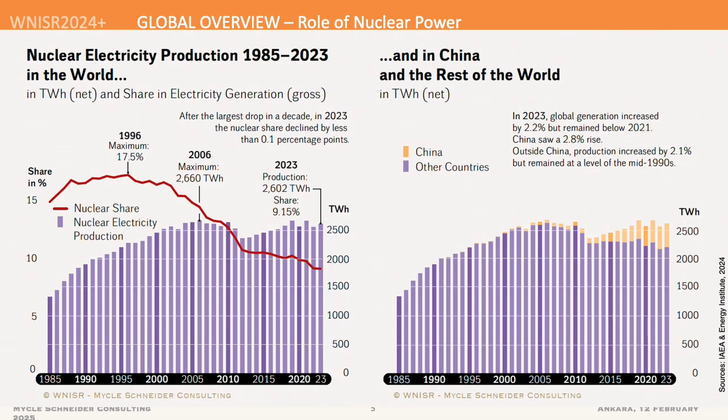The nuclear share of world electricity generation, the red line on the left, has fallen by nearly half to 9%. Nuclear output in purple has stagnated. Ember preliminarily estimates 2024 nuclear output at a 3% rise. On the right, the output growth is more than all in China, the yellow parts of the bars. In the rest of the world, it fell back to the level of the mid-1990s.

World nuclear capacity, in red, is 1% above its previous peak in 2006, because the fewer but newer reactors tend to be larger. Not included in the 411 units shown here are 31, 19 of them in Japan, that are in long-term outage. Most have been out of service for 14 plus years, without clarity on whether or when they might resume operation.

Mainly at the insistence of Japan, the International Atomic Energy Agency, IAEA, long counted those plants as operational, but then abandoned this fiction in 2022 and retroactively adopted a similar suspended operation category. In 2024, this new convention added only 8 gigawatts to Schneider's total of operating plants in this graph.

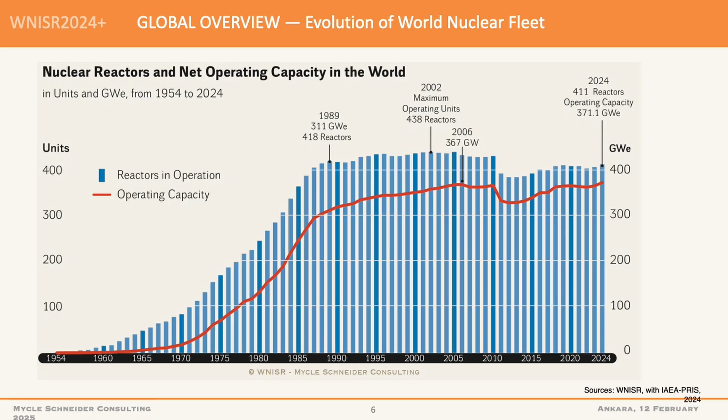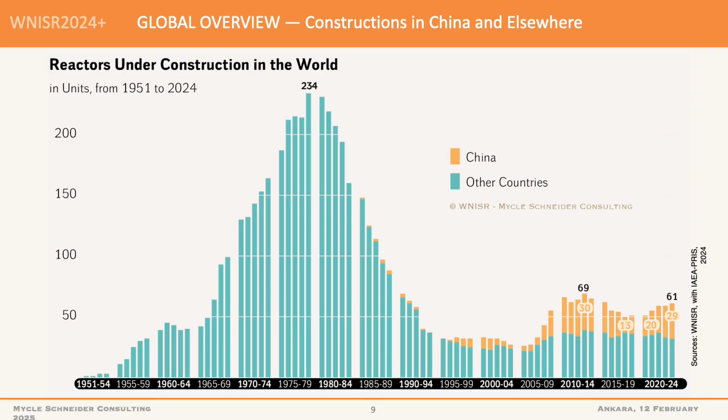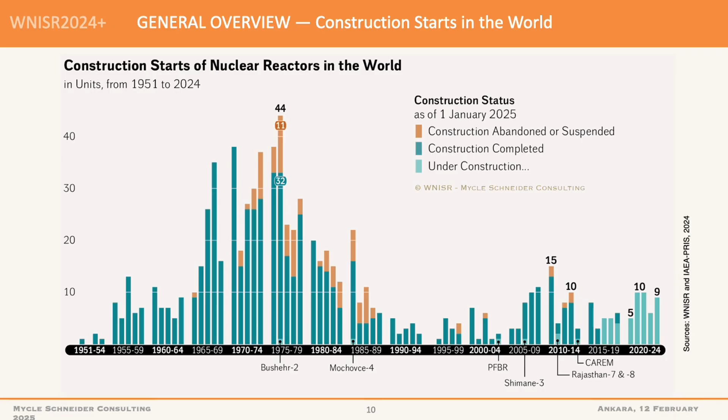Reactors now under construction are far fewer than in the 1970s, that big cluster of blue bars, and of those, 1 in 9 projects in gold didn't get finished. Now, it's hard to discern the widely proclaimed nuclear renaissance, especially outside China, with just 1 to 5 units started in each of the past 5 years.

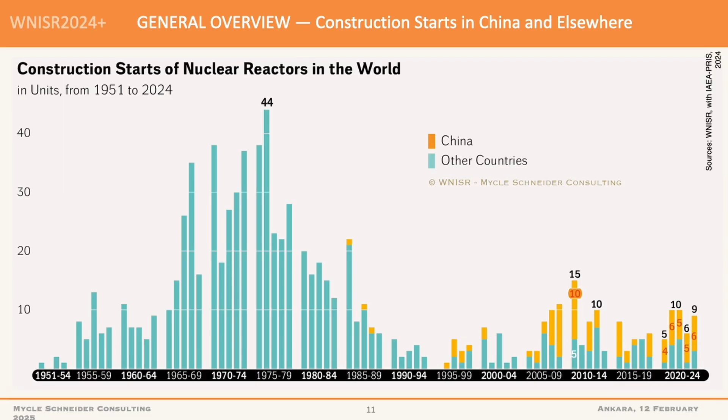3/5 of the world's construction starts, 2020 to 24, were in China, where the nuclear bureaucracy remains potent, although its targets are quietly shrinking. Despite complete government control, only 1 recent reactor in China in 2021 to 3 was connected to the grid on time.

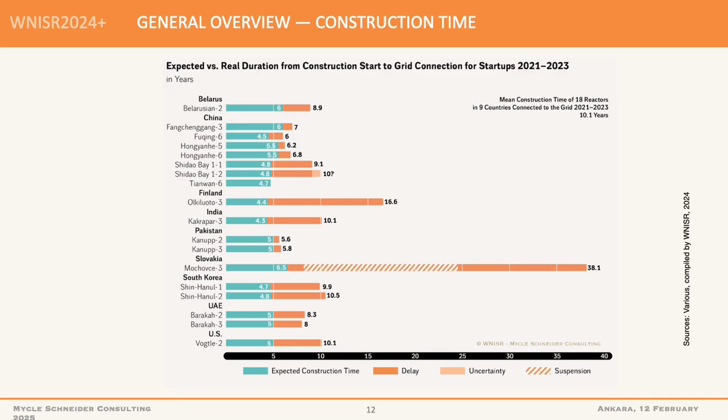Global average nuclear construction took 10 years versus China's 6 and rising, with a range from 4 to 10 years. And yes, I did mean to imply that with that one Chinese exception, no recent reactor completion has been on time anywhere. Now, China's fleet averages just 11 years old, and only 1 unit is older than the world average.

But the other main nuclear fleets are far older, and like people, they get a year older every year. Unlike people, though, intense radiation damages their materials and radioactivity complicates their maintenance.

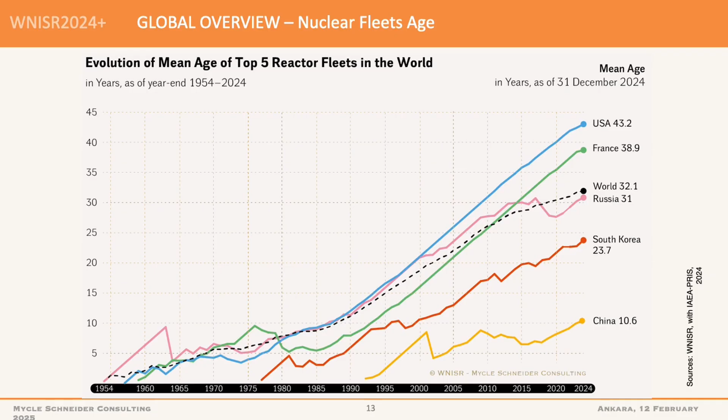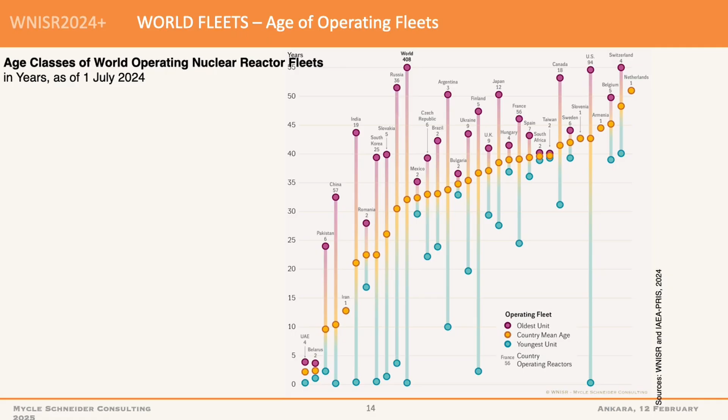Operators do try to upgrade plants with newer components, like digital controls, but this is difficult and complex, and it cannot prevent the gradual deterioration of materials: massive metal vessels, pipes, heat exchangers, welds, and so on. Most national nuclear power fleets are over 30 years old, vertical scale on the left. The oldest reactor still operating in early 2025 is in Switzerland and is just over 55 years old.

Many reactors originally designed to last 30 or 40 years have nonetheless won license extensions to 60 or 80 years. However, that extrapolation from experience may overstate their practical operating life, because old reactors, like old cars, tend to break more and cost more to fix.

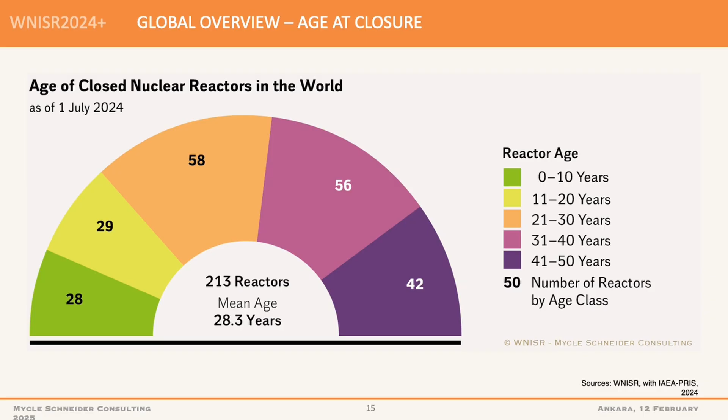Through 2024, the world's 213 closed reactors averaged 28 years of operation. The majority closed before age 30. Only 1/5 of them lasted more than 40 years. The reactors that were closed from 2019 through '23 averaged 43 years old. So again, there's not much empirical basis for extending licenses to 60 or 80, and it may not reflect how long they actually end up running.

But already the technology is scarcely relevant. In China, nuclear output was surpassed by wind power starting in 2012, by solar power starting in 2022. In 2023, China connected 1.2 nuclear gigawatts to the grid, plus 293 gigawatts of solar and wind power, because they're faster and at half the cost. In 2024, China added 2.1 gigawatts of nuclear power, plus 357 gigawatts of solar and wind power.

Globally, nuclear power in 2024 added 3.9 more gigawatts than it retired, but solar added 599 gigawatts and wind power added 131 gigawatts. So this 2 order of magnitude gap in deployment rate continues to expand for fundamental reasons. Normally, that would mean game over.

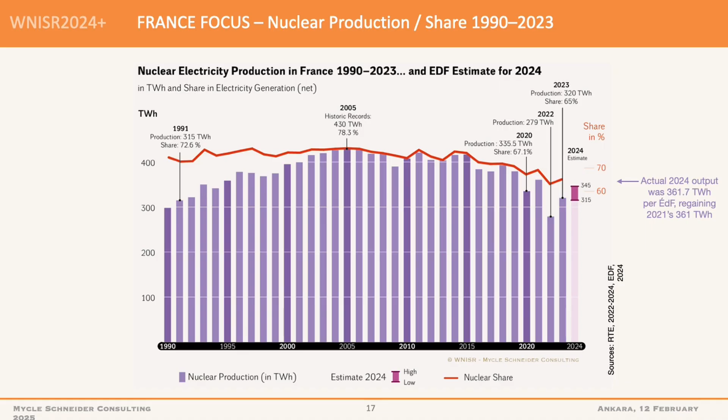If the French nuclear fleet's shortfall from 2019 to '22, as you can see at the right side of this graph, were offset by combined cycle gas generation, a reasonable assumption, it would have burned nearly twice as much gas as the spring '22 shortfall in total European gas storage that gave Putin such leverage. And the national utility, Électricité de France, cannot afford to modernize its 56 reactors, let alone replace or augment them.

The biggest economy so far to abandon nuclear power is Germany, which simultaneously slashed fossil fuel generation as renewables in 2024 soared to 55% of electricity consumption, or 63% of net public supply. And electric efficiency rose to 55% more than in 1990. In 2024, Germany's coal and lignite generation was the lowest since 1957.

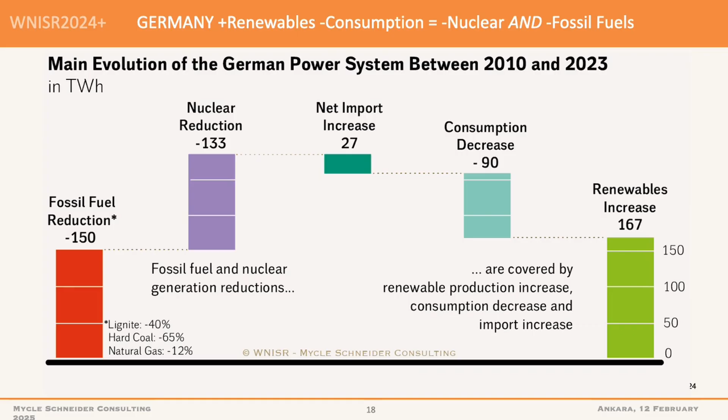You can see the evolution here with the cumulative since 2010 fossil generation going down. The reduction is in red. Nuclear going down in purple. And there was a slight increase in net imports just in the last couple of years. But meanwhile, consumption decreased in aqua and renewables soared in green. So that's how the books balance.

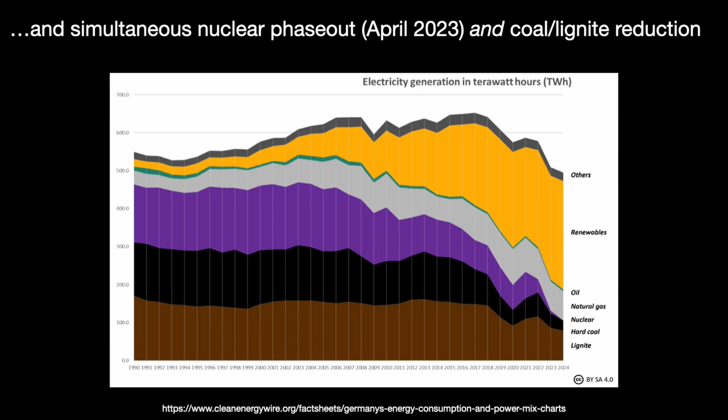Now, here's a more graphic version of what happened in Germany. Just as nuclear power in purple ended, generation from coal in black and lignite in brown continued to fall right through 2024 and still. Notice when you look at the more detailed data behind that chart, the especially steep decline in the black coal curve and the brown lignite curve from '22 to '24, even as the last reactors in purple closed forever in April '23. Claims that Germany had to burn more coal to replace shuttered nuclear plants are wrong, with or without counting international power trade.

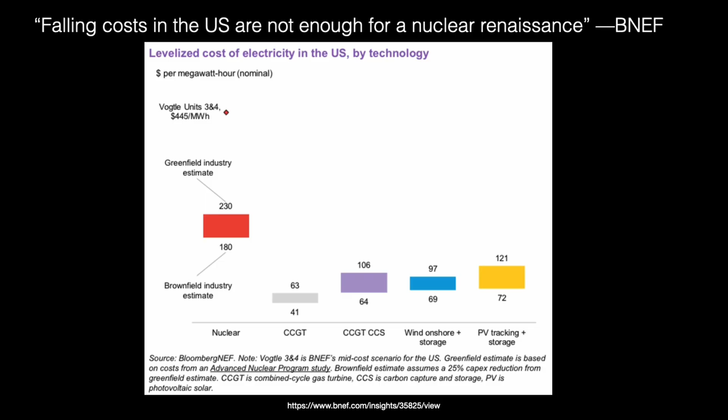But if it occurred, Bloomberg's latest comparison says it would be several-fold costlier than a new gas plant with carbon capture or a hybrid wind or solar project firmed by battery storage. History also suggests that nuclear costs are likelier to keep rising even as renewable costs keep falling. Now, empirically confirming the message of this chart, Jim Lazar points out that in less than a year, 2024, investors in free market Texas added enough wind, solar, and storage to provide dispatchable service equivalent to both the Vogtle nuclear units, but at about half their $36 billion investment, a third their operating cost, and a decade and a half sooner.

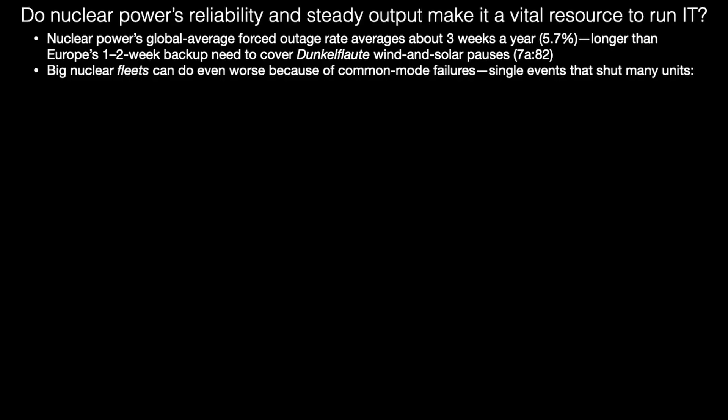Many people seem to believe that only nuclear power can provide the exceptional reliability needed to run data centers. However, the average nuclear plant suffers unexpected outages about 3 weeks per year, 5.7% of the time. That's longer than the typical total 3.5% per year duration of the Dunkelflaute dark doldrums events in Germany. Big nuclear fleets can do even worse than individual plants because of single events that shut many reactors at once, like earthquake and tsunami in Japan.

Or the French example you've seen from 2019 to 21, when repairs or safety checks closed over half the aging reactors, and steep drops in output persisted into 2024 at levels several times longer than the rare maximum wind lulls in the United Kingdom. Nuclear plants are also prone to derating or interruption by heat waves or droughts that affect their copious need of cooling water.

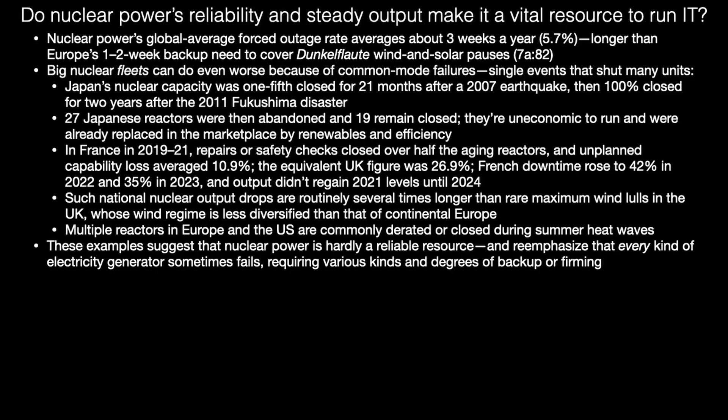So nuclear power, in sum, is hardly a reliable resource. Like every kind of electricity generator, each reactor sometimes fails, requiring adequate other arrangements like backup or firming, or the equivalent on the demand side.

Now, since early 2024, sudden forecasts of an imminent return to electricity growth rates not seen for 4 decades have often been claimed to require new nuclear plants, especially so-called small modular reactors, which are supposedly faster. But those are not yet a thing. Claims of operation in a few years are not credible. Sales hype is not evidence.

And the giant tech companies claimed to have bought various new kinds of reactors have in general only expressed interest, not entered actual binding purchase contracts. Curiosity's cheap, reactors are expensive.

A little history about the construction cost that dominates total nuclear cost. In contrast to the falling renewable costs we've seen, nuclear capital cost escalation and delay are the norm now and from the start of the industry. There are some claimed exceptions in Korea and China, but those data are unverifiable and often highly dubious.

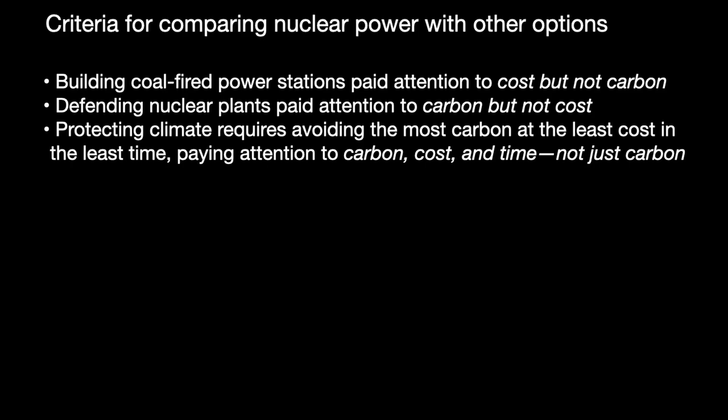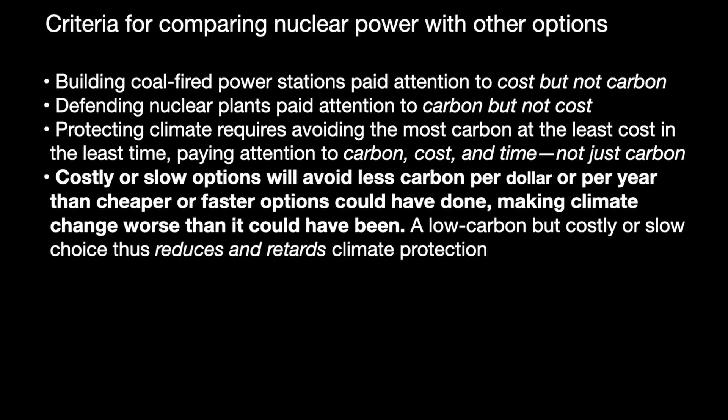So to start examining nuclear power and climate protection, let's ask, how should we compare different ways to provide electrical services? You see, we built coal-fired power plants by counting cost but not carbon. Nuclear advocates defend their option by counting carbon but not cost. But to protect the climate, we must save the most carbon at the least cost and in the least time. That means counting all three variables, carbon and cost and time. Costly or slow options save less carbon per dollar or per year than cheaper or faster options. Thus, even a low or no carbon option that is too costly or too slow will reduce and retard achievable climate protection. I posted a simple way to compare climate effectiveness using market data.

Now, many analysts ignore common sense comparisons of cost and speed. That leads to results akin to arguing that since people are hungry, hunger is urgent, and caviar and rice are both food, therefore both caviar and rice are vital to reducing hunger. Since in reality money and time are both limited, our priorities in feeding people or in providing energy services must be informed by relative cost and by relative speed. Lower cost saves more carbon per dollar. Faster deployment saves more carbon per year. We need both those outcomes.

The fraction of journalists and commentators who mention this logic is very close to zero because the nuclear industry is desperately keen that you not hear or understand these points. Now, the economic principle called opportunity cost means that you cannot spend the same money on two different things at the same time. That is, each purchase foregoes other purchases.

Buying nuclear power, therefore, displaces buying efficiency and renewables, and vice versa. So nuclear owners strive to beat coal and natural gas, methane gas, while their allies often disparage or suppress renewables. Yet most U.S. nuclear plants are uneconomic just to run, unless that's reversed by subsidy as happened, we'll see. Many of them are closing, so their powerful owners often got multi-million-dollar bailouts from malleable, or as we just learned in 3 states, corrupt state legislators and from the federal government.

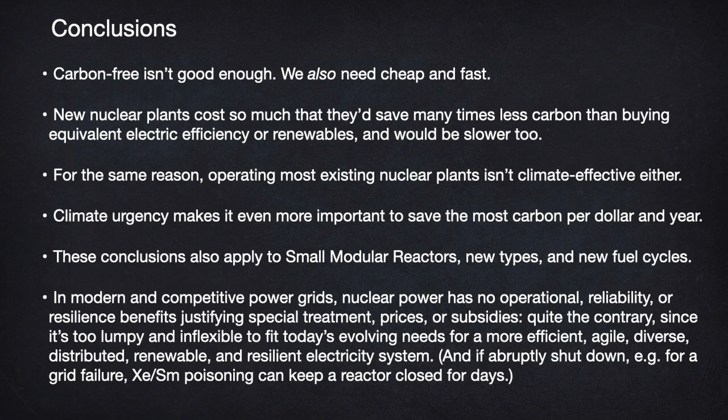Nuclear power also offers no benefits for grid reliability or resilience justifying special treatment. Instead, its inflexibility and ungraceful failures complicate modern grid operations. As we saw last week, traditional so-called baseload generation by big thermal plants is no longer needed nor economic, and the whole concept isn't even useful anymore. Such basic economic comparisons are a topic the nuclear industry normally tries to avoid. The last thing they ever want to talk about is economics. But if a technology cannot come close to competing in actual markets, its other attributes become a lot less important.

Now, obviously, dismal economics crimp new nuclear power, but that leaves the big question, what should we do about the existing 410 reactors? Should they keep operating? Many cost more to run than their output can earn, or than it would cost to provide the same services by building and operating new renewables or efficiency. There was a 2019 IEA report dubiously claiming that sustaining the existing nuclear fleet is vital for climate protection, is cost-effective, and merits government support.

But it wasn't really a fair comparison based on empirical data and counting opportunity cost. And it really rested on a very opaque model, very complex, full of assumptions that couldn't be drawn out and scrutinized. So instead, let's just examine briefly some current already paid-for reactors' empirical operating competitiveness. I'll just walk you step by step through a 2020 eye chart, now the case is even stronger, about nuclear operating costs, those that need not be paid if the plant does not operate. So the light green zone shows the range of U.S. wholesale real electricity prices from 2003 to 18.

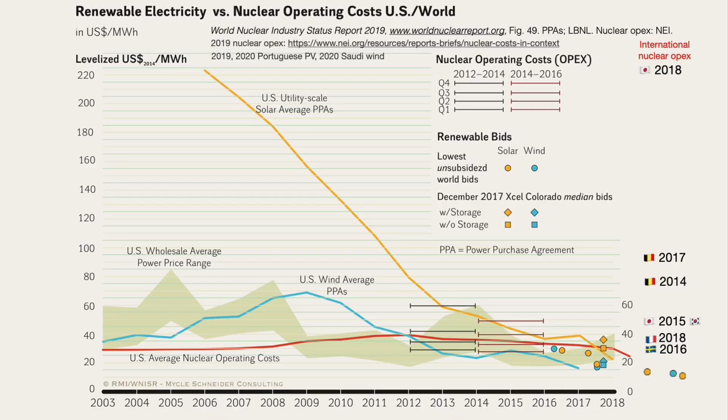Now, these operating cost data reveal an important climate opportunity that the nuclear industry hopes you won't discover. The reported operating costs for the costlier to run half of U.S. reactors a few years ago were running about 4 cents a kilowatt hour. The costliest quartile, probably around 5 cents. And the owners got those vast new subsidies to keep running those money-losing plants. Supposedly they have to prove they need the money, but the referee is the Department of Energy, which is a strong promoter.

And yet customer efficiency actually costs utilities only an average of 2 or 3 cents per saved kilowatt hour, less if they shop around. And therefore closing a top quartile cost nuclear plant and buying efficiency instead, as owners could volunteer or regulators could require, would save several times as much carbon as continuing to run the nuclear plant. In other words, it may be carbon-free in operation, but it still saves a lot less carbon than if you didn't run it. And some modern renewables could also compete with it.

In other words, while we close coal plants to save carbon directly, we should also close distressed nuclear plants and reinvest their large saved operating costs and subsidies in cheaper options to save carbon indirectly. Replacing a closed nuclear plant with efficiency or renewables, we know from when it's happened at state level, only takes 1 to 3 years. Now, if owners don't give such advance notice, perhaps to extort subsidies by making closure more disruptive, more methane gas might temporarily be burned, but then it would be more than offset by the cheaper carbon-free substitutes quickly following.

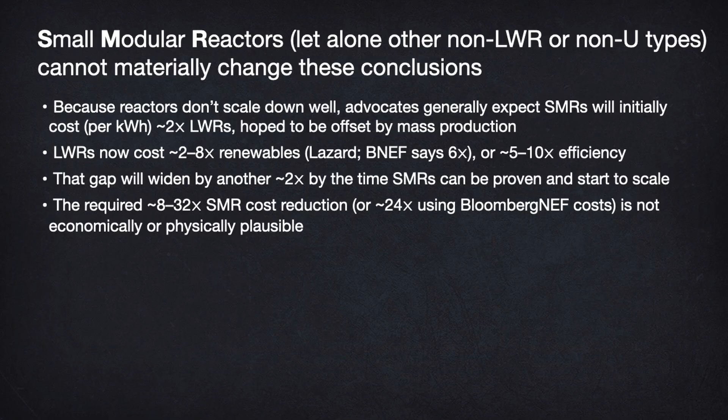costlier than on-site efficiency. But by the time SMRs, if successful, could begin mass production to capture economies of scale that way, their carbon-free rivals are set to get another twofold cheaper, based on the observed learning curves that nuclear power's never demonstrated. So just do the math. 2 times 2 to 8 times 2 means that mass production must make SMRs about 8 to 32 times cheaper, or Bloomberg's cost figures would give about 24 times. Neither of those ranges is remotely plausible.

SMRs simply can't catch up because small modular renewables, which do scale down well, have decades head start in exploiting their own formidable economies of scaling and learning. Novel reactor designs and fuel cycles offer no escape because even if the minor nuclear part of the whole prohibitive capital cost of today's reactors were free, the non-nuclear remainder would still be about 2 to 6 times too costly. Nor could SMRs be developed and scaled before the U.S. grid is decarbonized anyway without them.

So SMRs would only divert investment, attention, talent, and time from off-the-shelf, popular, benign competing technologies that have already proven rapidly scalable and that win over $1 trillion of private investment each year. Substituting slow, costly SMRs would thus make climate change worse, and it would make proliferation vastly worse. I am astounded and appalled that the Department of Defense is letting the Department of Energy undercut its national security mission by promoting the most proliferative kinds of fuel cycles, things the U.S. just spent decades with its allies trying to prevent.

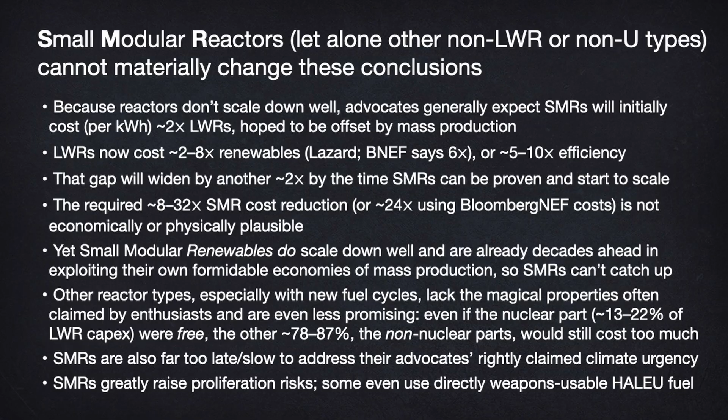Now, besides the distraction, there is, in my view, an overriding reason not to pursue nuclear power further, even if it could compete. It's the only energy source whose side effects could end civilization abruptly rather than gradually like climate change, and that requires a global safeguards regime. Clearly, that regime is not working. Iran, North Korea. Fortunately, the market collapse of nuclear power, if recognized and permitted, now offers, belatedly, but better late than never, a market-driven opportunity to cut off further proliferation at its root, and probably even roll back some that's

now underway. I've been proposing this since the late 1970s, but too far ahead of my time, so nuclear theology has prevailed, hence today's proliferation mess. But might this be an idea whose time has finally come? Let me summarize the argument very briefly in 6 points. Nuclear power makes widely available in innocent civilian disguise all the ingredients of do-it-yourself bomb kits by 20-odd known methods.

But if we didn't have nuclear power, that is, if we took economics seriously, then those ingredients would become harder to get, more conspicuous to try to get, and politically much costlier to be caught trying to get or supply, because for the first time the reason for wanting them would be unambiguously military. The civilian disguise would be stripped away. That doesn't mean that getting those ingredients of do-it-yourself bomb kits would be impossible, but it would be a lot more difficult, and it would be easier to detect timely, because it's a lot easier to find needles without the haystacks.

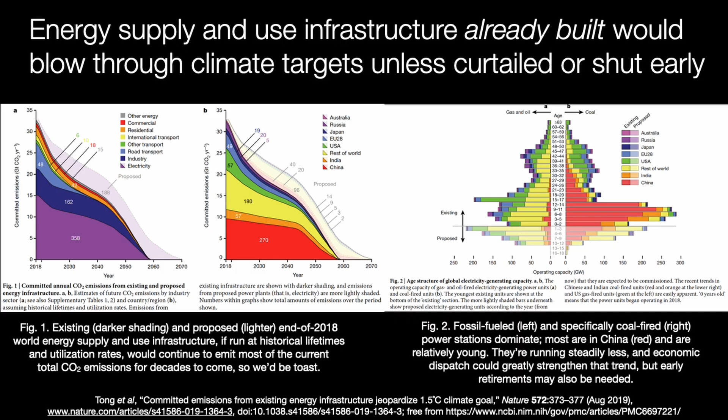And as this doctrine spreads across the whole power sector, it very much disadvantages coal and advantages renewables. Now, operating all these assets at their expected outputs for their expected lifetimes would lock in about 1 2/3 Kelvin of warming all by itself. So we can't do that.

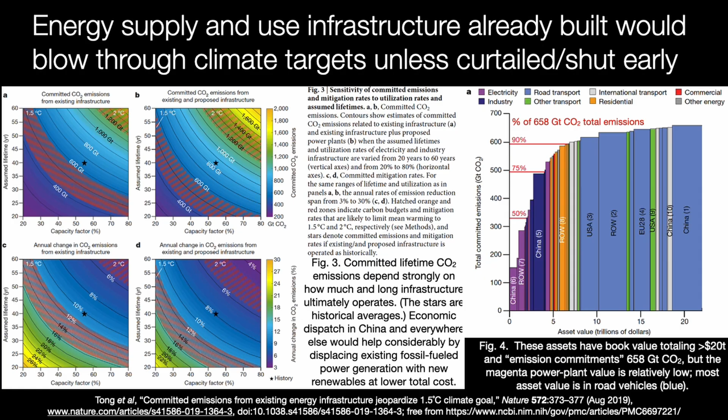Wow. For the coal plants that by far dominate those emissions, the transition to less operation and early retirement is well underway and accelerating, driven partly by policy and societal demand, especially for clean air, but mostly by basic economics, now starkly evident for Chinese coal power. The Paris Agreement's 1.5 Kelvin aspirational goal for limiting global warming would require 80% of 2010 coal-fired electricity generation to stop by 2030. That means closing one plant per day to 2040 and essentially all of them by 2050. But now this would actually be profitable.

This important 2020 study that RMI collaborated in looked at coal-fired electricity's imploding economics for 2,500 coal plants, 95% of the global fleet. It found that 39% of that coal capacity cost more to run in 2020 than building and running new renewables, including battery storage. That 39 was expected to rise to 60% in 2022, 73% in 2025, even faster in China and India. I don't have an exact update of this study, but I think it's pretty much what happened.

Many coal plants' operating costs are becoming so uncompetitive that closing and replacing them back in 2020 with modern renewables, including battery storage if you think you need it, would be cost neutral in 2 years and would save over $100 billion a year by 2025. So continuing to run those coal plants is wasting vast amounts of money. The challenge is that 93% of the coal plant's operating cost is not instantly variable. It's in long-term contracts and tariffs that insulate coal for some period from clean competition.

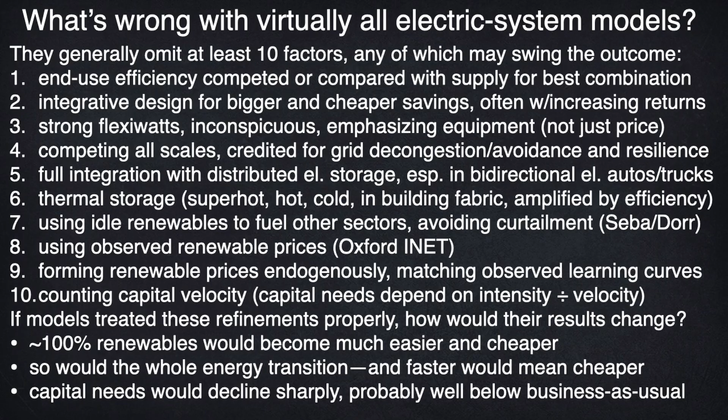Well, slides 7A, 86 to 88, and 7B, 38 illustrate the power of combining just a few of these 10 classes of grid and system balancing solutions. Several of them, starting with strong end-use efficiency, are so important that they can probably swing the whole result by themselves. And that's what we found in these Oxford findings that you saw in 7A 88, which global markets are

now validating. Bloomberg New Energy Finance raised its forecast of photovoltaic additions in 2023 from 270 to 390 gigawatts during about a year while they were happening. In other words, they were whizzing by so fast, the analysts couldn't keep up, and they couldn't see a clear enough image of what was happening. It was just a blur.

In 2024, those additions of photovoltaics soared to almost 600 gigawatts. Solar operating costs also fell 90% in the past decade. They keep falling every year. Professor Mark Jacobson at Stanford estimates that to replace all fossil fuels worldwide would take about a $62 trillion investment, or about the same as McKinsey proposes for hydrocarbon investment.

But the renewables strategy would save $11 trillion per year. That's an 18% return on investment, or a simple payback under 6 years, plus any avoided harms. It's like Bloomberg's calculation that they say the net zero scenario would take 19% more investment than the base case scenario, but that doesn't count the avoided fuel costs. You have to read the fine print in these studies.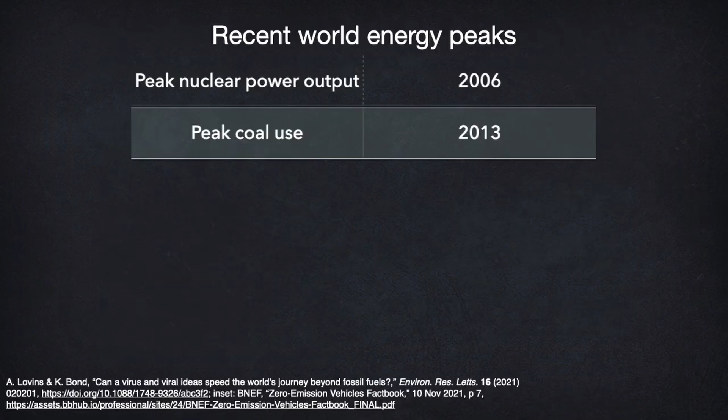Peak nuclear power output, coal use, auto sales, and fossil power already happened. Fueled auto sales have been shrinking ever since 2017 because electric cars took more than all of the growth.

They just blew away the forecast. IEA says the pandemic slump in 2020 undid the previous 4 years of global energy growth and 9 years of CO2 growth. But meanwhile, renewables grew 45% faster, adding 278 gigawatts of capacity in 2020, 290 the next year.

In 2024, renewables, again, outdid themselves. Let's see, 599 plus 131, that's 730 gigawatts. And corporate power purchase agreements, almost all renewable, totaled 62 gigawatts. So by the time and to the extent demand recovers somewhat, renewables will probably have expanded enough to supply about any future growth, and that tips fossil fuels into permanent decline.

Therefore, peak oil, peak fossil fuels, peak CO2 emissions all happened during about 2019 to 25, with fluctuations still of a few percent due to weather or war or Chinese industrial policy along this bumpy plateau as those declines begin right around 2025. A couple of examples. All three of Bloomberg's 2021 supply scenarios, renewable, prolonged fossil, and in red, exuberantly and exorbitantly nuclear on the right, now show peak fossil fuel use in 2019.

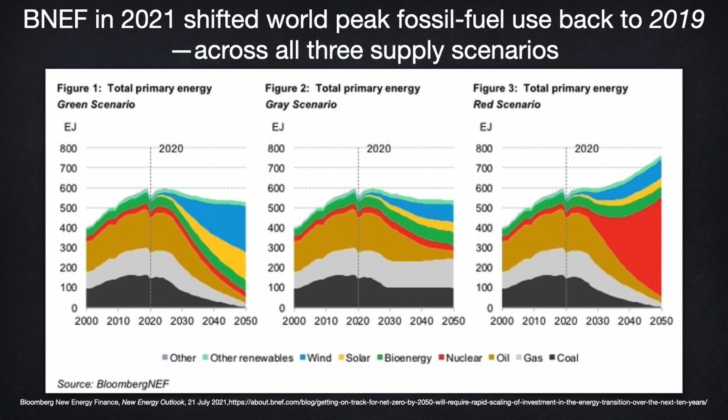In this new world, investors rapidly shift their capital to renewables and efficiency. Efficient use makes renewables gain share faster. Efficiency outcompetes fossil fuels sooner. Renewables and efficiency strongly reinforce each other. Well, that was 2021. By mid-24, Bloomberg scenarios still show peak coal in 2023. Peak oil a little later, 2028 or 9.

Bloomberg's analysis of renewables is, as usual, convincing and thorough, of grid integration, unduly constrained, and of efficiency, sketchy. Analyzing efficiency, including integrative design, as well as they analyze renewables, would give Bloomberg a far stronger, more helpful result. I hope we can help with that. However, it is encouraging that peak emissions have probably already happened. Now we just need to drive them down a lot faster. Here's one thing that helps.

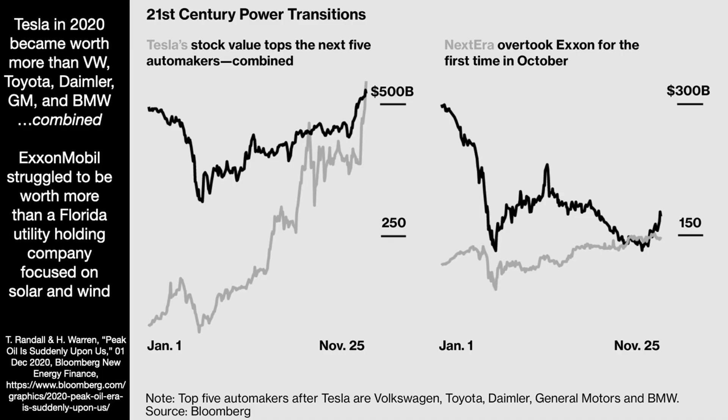So Apple was recently worth more than the top 16 hydrocarbon companies combined. Tesla is worth more than all the world's significant automakers combined. Capital flight also weakens incumbents' recruitment and retention of talent. It makes them pay more for capital. It reduces the political power that long helped them protect their subsidies and block new competitors. Those trends, in turn, all speed fossil fuels' delegitimization and decapitalization, although spiking influence can temporarily mask long-term trends.

Kingsmill Bond explained that capital flight is triggered by a fast-growing competitor in a slow-growing market. What's that? Well, growth in global primary energy demand is the rate of GDP growth minus the rate of improving energy intensity. And that small difference between two small numbers has slowed by 2/5 in the past quarter century. But long-term carbon emissions are exquisitely sensitive to that small difference, and hence to the speed of saving energy, no matter what GDP does. So further speeding energy savings could avoid enormous carbon emissions by speeding capital flight from incumbents to insurgents. How can we exploit this sensitive intervention point by deeper, cheaper energy savings implemented even faster?

Well, maybe greater speed could come from integrative design, because its contagious ideas, transmissible often by hearing a phrase or seeing a photo, could spread at the speed of social media, perhaps even rivaling the speed of scaling solar power. There isn't literature I can find comparing the potential speed of spreading viral ideas versus scaling hardware, but the same attributes that make solar power scale quickly also seem applicable to integrative design.